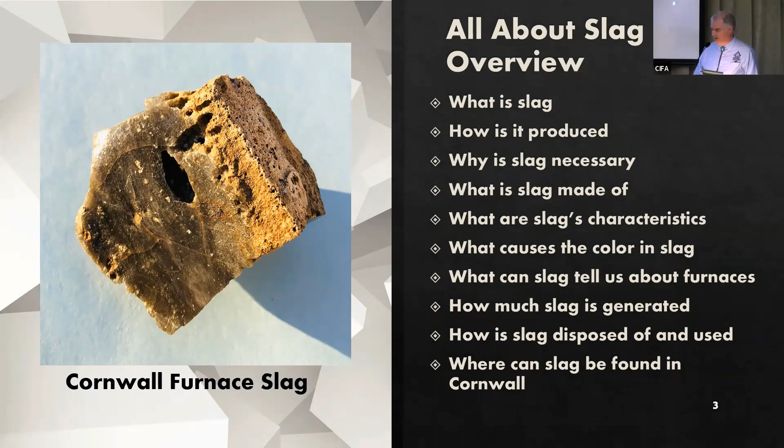Slags are produced with many refining processes involving metals. I'm not going to get into those other metals. While there are some similarities, there's also some significant differences. And besides, if we just talk about iron blast furnace slags, we'll have more than enough material for our presentation this evening. So let's begin with what is slag?

Well, according to the American Society of Testing Methods, one of the US standards organizations, slag is the non-metallic product developed simultaneously with iron in a blast furnace. Okay, what does that mean? In other words, slag is the solid material other than the iron that comes out of the furnace. Whatever solids need to be removed from the furnace, if they don't come out of the furnace in the iron, they have to come out of the furnace in the slag.

Although the slag contains impurities that are present in the iron ore, the slag actually helps to remove those impurities that are naturally present in the iron ore and get them out of the furnace so they don't come out with the iron and they don't go up the stack with the gases.

The photo on this slide shows about 40 to 60 layers of slag that accumulated over time. Some of you might be familiar with this. This is pretty close to Cornwall Manor. If the slag was deposited in this location twice a day, you're looking at about 1 month's worth of slag that accumulated at this location in this 20-foot thick section of slag.

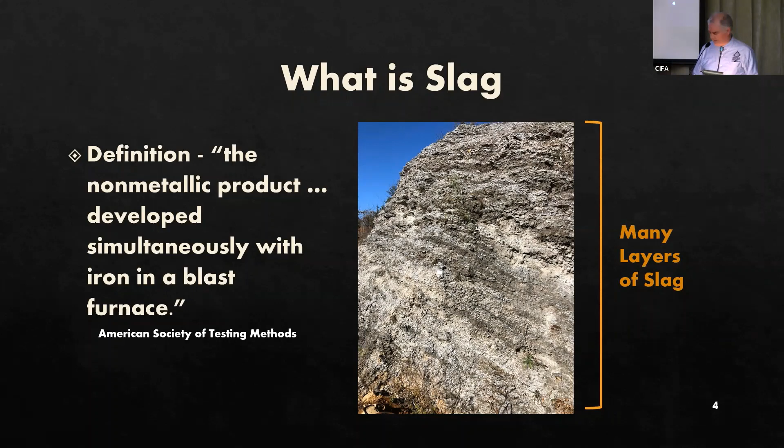So just to review, here's a cross-section of a typical iron blast furnace. And I'm talking tonight primarily about those furnaces that operated in and around Cornwall. So from a date perspective, we're talking about furnaces that operated from about 1740 until the early 1900s. At Cornwall Iron Furnace, the iron ore, charcoal, and limestone were dumped as solid materials in through the charging hole in the top of the furnace.

The charcoal was the fuel, and it burned primarily at the bottom of the furnace where air was injected into the furnace. The gases from the burning charcoal and also from the limestone and ore went up the stack and exited out of the top. As the solid limestone and iron ore descended deeper into the furnace, they eventually melted. And then the iron was tapped or discharged at the bottom of the furnace, where the slag was also removed from the furnace.

Now, before we leave this slide, I wanted to highlight two interesting factoids about the operation of these kinds of furnaces. So the first one is that air injected at the base of the furnace travels as far upwards in 1 second as all the descending solids move downward in 1 hour. I'll repeat that. The air injected at the bottom of the furnace moves as far upwards in 1 second as all the solid materials dumped in the top of the furnace descend in 1 hour. It's kind of mind-blowing when you think about that.

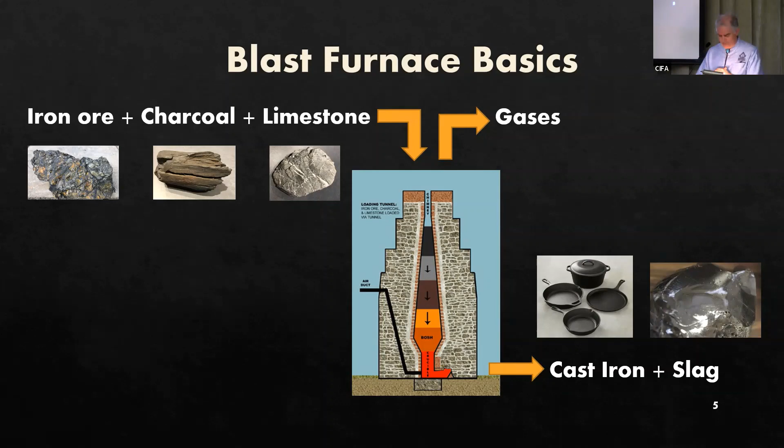That's pretty astounding. That's a lot of air, and it also tells us a lot about what's going on in the furnace, what kind of processes are going on, and some of the dynamic movement of materials, the air, the charcoal, the iron ore, and the limestone.

So when a furnace is tapped, the slag is removed first because the slag is less dense than the iron that is more dense underneath. So in the early furnaces, the slag was directed to gutters and then allowed to flow out onto the sand in the casting room where it cooled. You can see in this picture hot liquid slag flowing out of a furnace and then collecting in a rail car that was designed to transport that slag away from the furnace.

You can also see in the background there, those horizontal layers. That is also slag that was previously tapped from the furnace, has become like rock and is sitting there behind the ladle that's picking up the slag. Now, after the slag was removed from the furnace, then the founder would tap the liquid iron and use that to cast pig iron or other cast iron items like hollowware, for example.

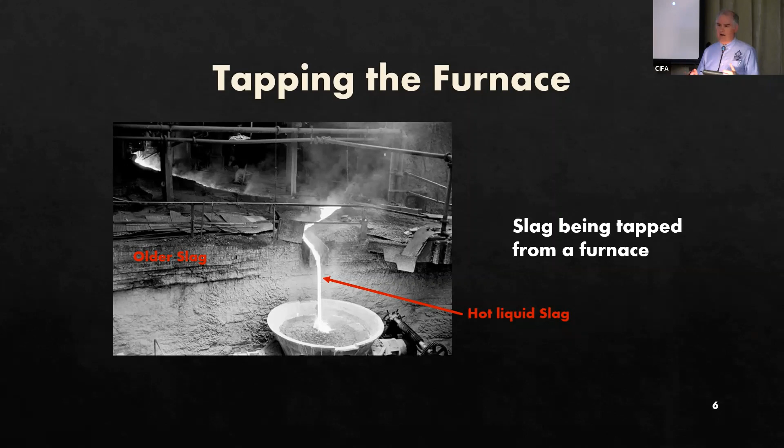So in this cartoon diagram, we can talk about how slag was produced. You notice that blob up in the upper left-hand corner. That simulates or symbolizes the iron ore. So you have iron, that's the Fe in there, and then you have impurities. The little green lettering signifies the impurities.

Most of that iron is present as iron oxide, or iron atoms that are chemically bonded to oxygen atoms. To produce iron from the furnace, you have to separate the iron from the oxygen atoms. And that's where the second ingredient, limestone, comes in. From the melting of the limestone and the burning of the charcoal, you can reduce the iron, taking it back to its native state. And that produces iron metal, which after all is the product that's sought from a furnace.

And then the impurities that were originally present in the iron ore become more attracted to the limestone than they are to the iron metal. So they leave the furnace in the form of the slag, which you see in this lower right-hand corner.

I should point out that in some furnaces, they didn't use limestone. They used things like clam shells and oyster shells, or they may have used other rocks that were naturally rich in calcium. But here in central Pennsylvania in the Lebanon Valley, we are blessed with lots of limestone. So you didn't need to use any substitutes in the furnaces around here. You had plenty of limestone to feed into them in the Cornwall, Lebanon area.

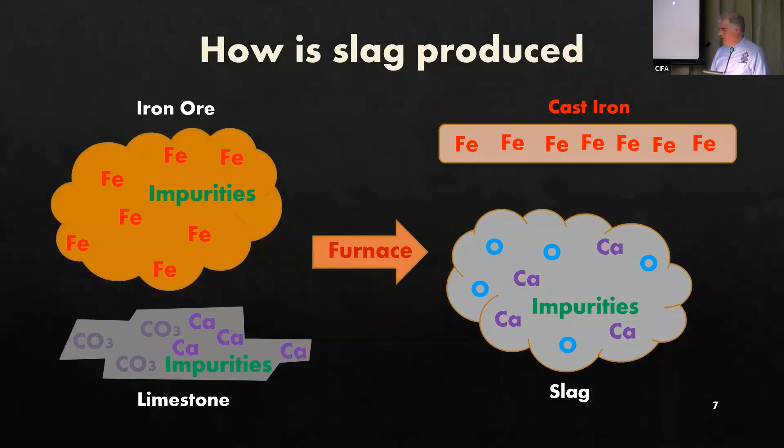Well, why is slag necessary? Ancient Chinese civilizations figured out 1,000 years before the Common Era, or about 3,000 years ago, that by adding limestone into the furnace, along with the charcoal and the iron ore, they were able to separate out the iron from the ore and remove the impurities. The molten limestone removed those impurities and kept them from clogging up the furnace.

In addition, sometimes other impurities come along with the slag. For example, coal, like anthracite or bituminous coal, or coke might come along out, or charcoal might come along out with the slag. You might have solid pieces of iron ore and limestone that don't quite melt in the furnace. They'll come along out with the slag. Sometimes ash residue from the combustion of the fuel will come out in the slag. And then sometimes even the lining of the furnace comes out along with the slag. It's not desirable, but nevertheless it happens.

In fact, sometimes you even find pieces of cast iron in the slag that escapes the casting process and comes out with the slag. So when you're walking around looking at slag, sometimes you can see pieces of iron. And I have some samples of slag which you're welcome to come up and look at after the presentation. We can talk more about what you're looking at.

And I had a gentleman donate some slag from the North Cornwall Furnace just before the talk. So we certainly appreciate that.

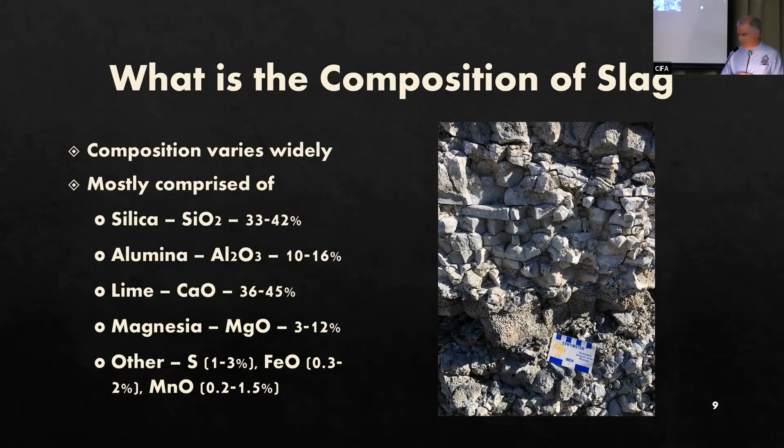So early scientists in the 18th and 19th centuries, when Cornwall Furnace was starting to fire up, had a difficult time characterizing the composition of the slag for a couple of reasons. One was the primitive state of chemistry as a science back then. And another was this complex relationship between the various components of the slag. For example, if the amount of lime increased, then the amount of alumina or silica would have to decrease proportionately.

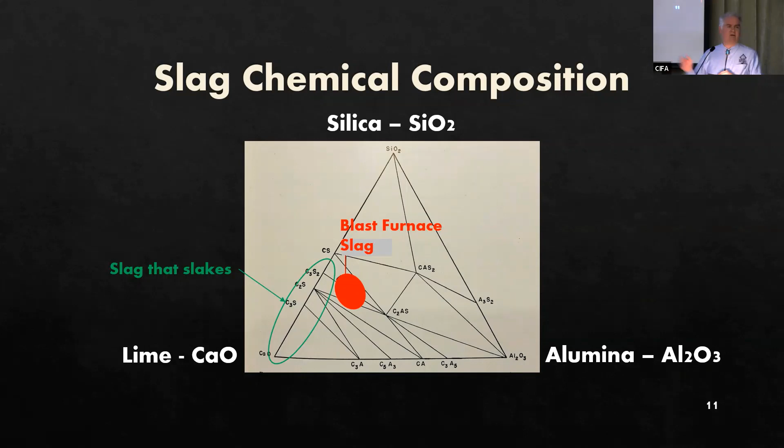Now, if the slag contained too much lime, which you see in that lower left-hand corner of the triangle, say, for example, more than 50% lime, then the slag slakes when it comes out of the furnace. It decomposes rapidly into a white powder when it's exposed to the outside elements. And that, like I said, is on the triangle down there in the lower left-hand corner.

Another way to depict the composition of slags is to examine the minerals that are contained in the slag. The chemicals combine to produce a variety of minerals. Because slag is made by humans and minerals are by definition naturally occurring, some geologists would say, oh no, don't talk about the minerals of slag. Nevertheless, for our purposes here tonight, we can describe slag in terms of the minerals that comprise the slag.

The formation of the crystals of these minerals is a function of the composition of the slag and also how rapidly the slag cools once it's removed from the furnace. It starts to crystallize. If the slag cools quickly, which it most often does, then there's not enough time for the crystals to form, and so you get very glassy slags. We were talking about that a little bit before the talk started tonight. Glass is non-crystalline, and so it's what's called amorphous.

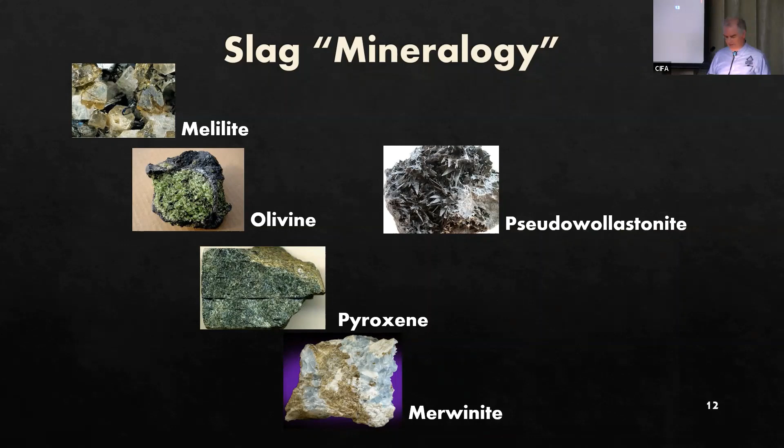So now that we've talked about what slag contains, we can discuss the physical characteristics of the slag. As I previously stated, these characteristics can vary considerably, just like the composition. One of the most characteristic features of slag is the presence of gas bubbles or voids or vesicular cavities. The voids in the slag give it a higher porosity, even though those voids may not necessarily be interconnected. But because of those voids, the slag is less dense than most rocks.

So the average bulk density of slag is about 80 pounds per cubic foot. Now at Cornwall Furnace, the slag that it produced is about 160 pounds per cubic foot. Again, it reflects the differences in the composition and how the furnace is operated. In addition, the slag tends to be highly durable. It's resistant to mechanical erosion. It can withstand high temperatures. It's relatively tough compared to other rocks, and it has a low thermal expansion.

And the color of the slag can vary considerably. Most slags vary from light gray to dark gray. In contrast, some of the more vitreous slags, like those that come out of a cold blast furnace, can take on a range of color depending on the impurities that may be present in those slags. For example, if you see a slag with that sky blue color, that may indicate elevated amounts of manganese present in that slag.

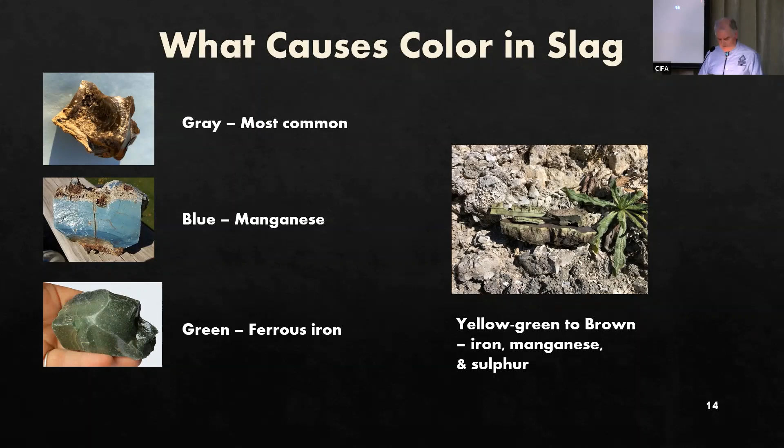Sometimes some high quality slags that are brightly colored, very glassy and don't have very many bubbles in them, can be cut, polished, and used in making jewelry. So some of those slags are highly sought after by collectors. So with that background, what can slag tell us about how the furnaces were operated? And why is slag so important?

Well, for centuries, workers at hot blast iron furnaces described ideal slag as hot, fluid, and gray. In other words, when the slag was tapped from the furnace, ideal slag flowed rapidly out of the furnace without froth or high viscosity and turned light gray when it solidified. The observation that the slag flows freely and rapidly means that the slag typically contains lower amounts of silica. Slag that contains too much silica would not melt properly in a furnace, so that would create other problems in the operation of the furnace.

The characteristics of slag in the furnace told the furnace workers about the composition of the slag and also the temperature at which the furnaces were operated. In the 18th and 19th century, without detailed chemical or physical ways to measure these things, the furnace workers had to rely on what they could physically observe in terms of the characteristics of the iron and the slag.

And that gave rise to two primary variables that the furnace workers tried to control in operating the furnace. First, the temperature at the bottom of the furnace, where the air was blown in and the slag and the liquid iron accumulated. And secondly, the proportion of limestone or the flux that was added in comparison to the iron ore and the fuel that was added into the furnace.

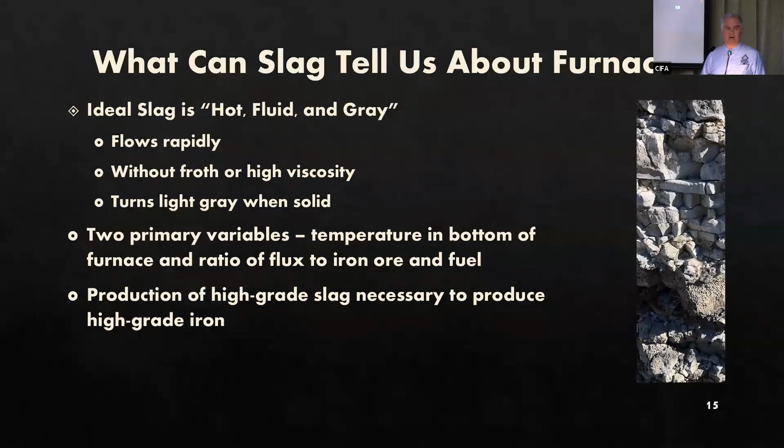So how much slag was generated by these furnaces? Well, as in most of the answers in my presentation so far this evening, you already got this recurring theme. It depends. It depended on a variety of parameters. In general, and we always have to watch generalities, but in general, about 1/2 to 1 ton of slag was generated for every ton of cast iron produced.

So at the Cornwall Furnace, which generally produced about 3 tons of cast iron a day and operated nominally about 9 months out of the year, Cornwall Furnace would have generated between 400 and 800 tons of slag a year. The anthracite, Burd-Coleman, and North Cornwall furnaces were much larger, so they would have generated much larger quantities of slag.

So, for example, in 1880, Cornwall Furnace produced 675 tons of cast iron. That was 3 years before the furnace closed. So that was about the peak of their production. In contrast, Burd-Coleman furnaces, and there were 2 of them, produced about 10,500 tons of cast iron a year.

If we use those amounts as representative for the furnace production of iron, that means that the Cornwall furnace would have generated between 48,000 and 95,000 tons of slag during its 141 years of operation. In contrast, Burd-Coleman furnaces would have generated between 200 and 400,000 tons of slag during their much shorter lifetimes.

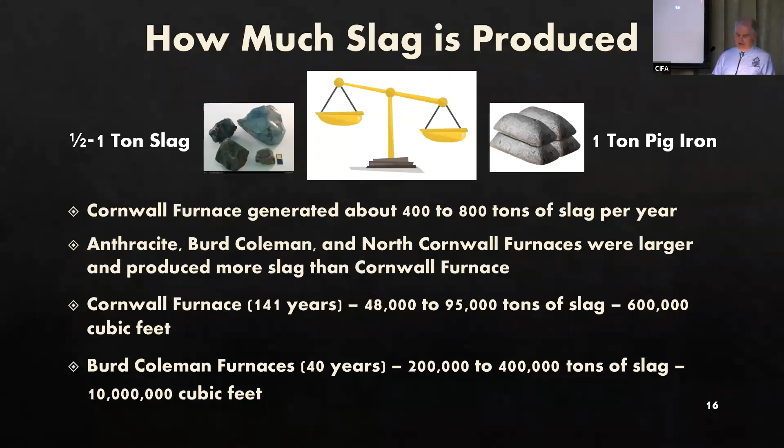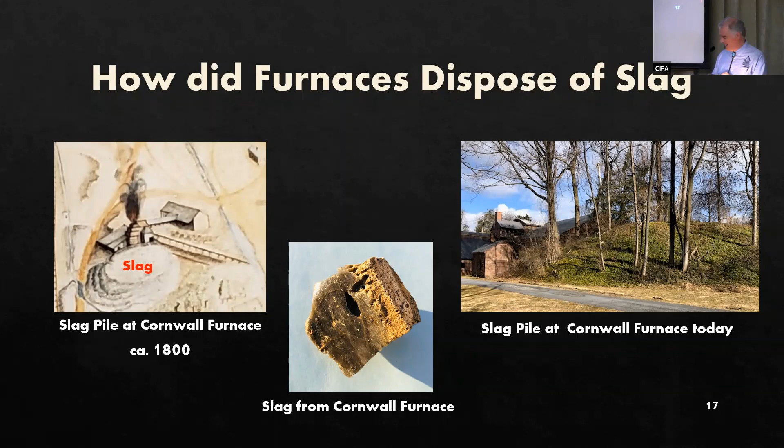Now, in later furnaces, particularly the hot blast furnaces that were larger and produced greater quantities of slag, the slag was tapped in its hot liquid form, and it was flowed into large ladles that were then either lifted by overhead cranes or were carried in special rail cars away from the furnace, where they were then dumped. Because the slag was dumped as a hot liquid, it would flow across the ground surface and find the lowest elevation, such as a creek channel.

As noted by the U.S. Bureau of Mines, and this is a quote out of one of the publications I have up here, quote, "One of the most striking features of an iron and steel plant is the mountainous bank of slag that presents a continuous pyrotechnic display as ladle after ladle pours its incandescent load down in an endless accumulation of a waste product," end quote.

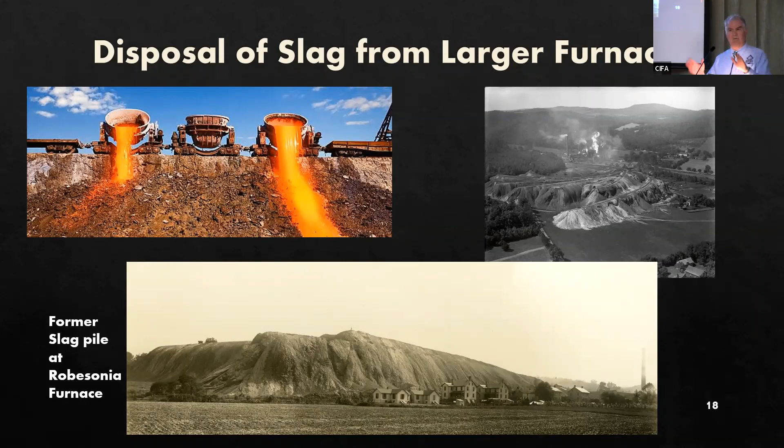So with all that slag, can it be used for some productive applications? Well, the answer to that is yes. Although the furnace workers considered the slag a waste, the slag could be used for beneficial applications. Even at Cornwall Furnace, even though we think most of the slag is present in that pile next to the furnace building, some of that slag was used as fill in the low-lying areas surrounding the furnace.

By the 1940s, countries around the globe were actively using their slag, generating about 66 million tons a year. And in that same year in the United States, about 60% of the slag that was generated was being used for beneficial applications. Now, historically, slag has been used for a whole variety of applications. I only list some here. For example, in Germany in 1589, they used slag to make cannonballs. That didn't work so well.

They also cut slag blocks and used them in construction in Europe in the early 18th century. Slag has been used as a railroad ballast, or as the roadbed for railroads, since about 1875. And in the 19th century, slag has been used for concrete and also cement, both in Germany and in the United States. For example, the Harrison Estate Building in Philadelphia was constructed in 1897, and as a demonstration project, they used slag and reinforced concrete to construct that building.

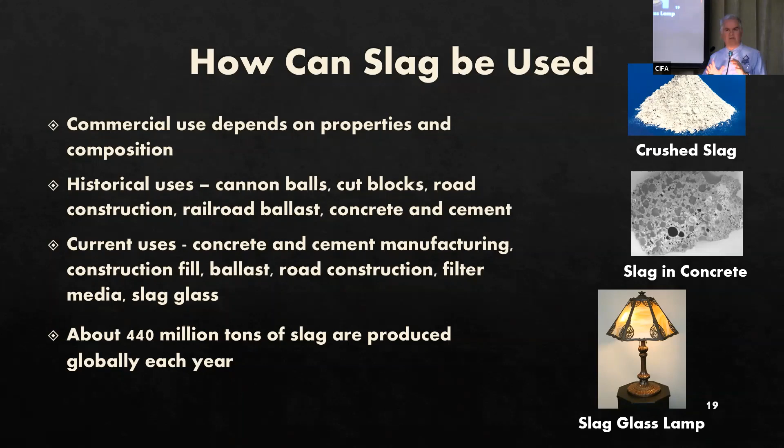Around the world, about 440 million tons of slag are generated now each year from both iron and steel furnaces. And that slag is used for construction fill, for road construction, concrete and cement manufacturing, and used as filter media. A small amount of slag is even used in producing slag glass. Some of you may be familiar with slag glass. You can see in that picture in the lower right-hand corner, it's that marbleized colored glass in the lampshade. That's slag glass.

So where can slag be found today around Cornwall? Well, because of the amounts of slag generated in Cornwall, slag can be found all over the place. Besides the relatively small pile that I already showed you next to the Cornwall furnace, slag can be found near and around the other blast furnaces that operated in Cornwall, including Anthracite Furnace, Coleman Furnaces, and the North Cornwall Furnace. Some of the slag has been removed and used for other beneficial purposes, such as road construction and railroad construction.